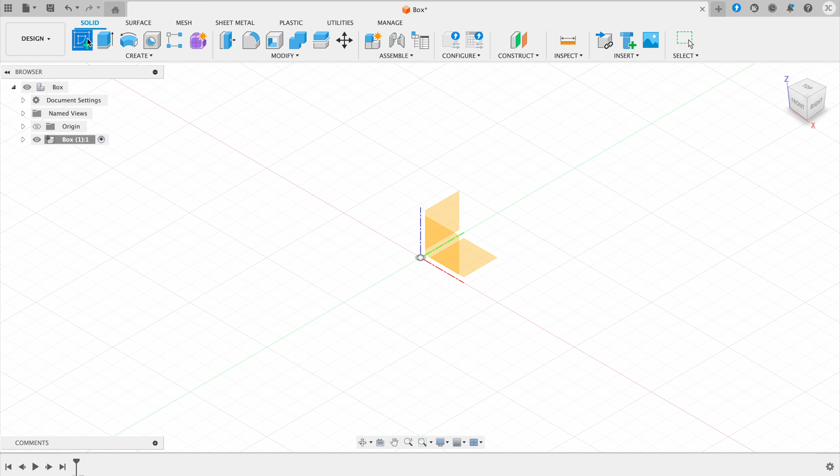Now that we have our new component, we want to draw a cube. So come over here and create a sketch, and click on this plane here.

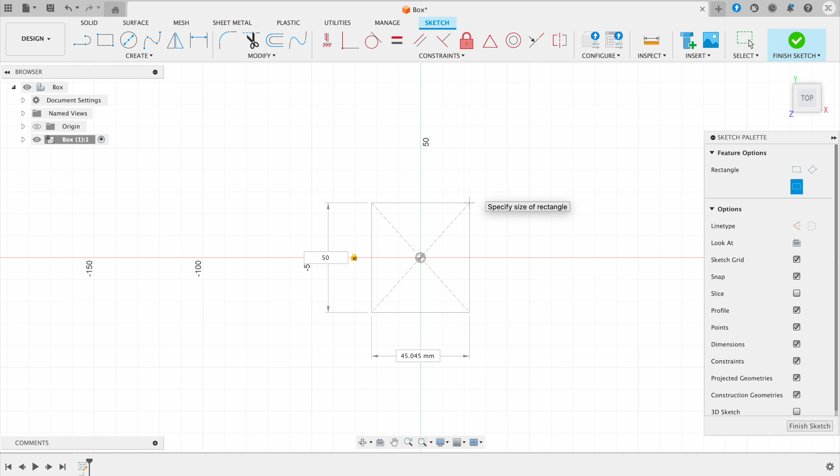Next, we want to click on create, click on rectangle, and then click the center rectangle. Then we click the center point, bring this out, and we want to do 50mm. Then hit tab, and do 50mm again. Then press enter on the keyboard.

Then we click on finish sketch, click on extrude, and extrude this out by 50mm again. Then click on OK to confirm this.

Now next, what I want to show you is importing and exporting. So I'm going to click on save here, and we're going to export this box.

As I mentioned in the first video, Fusion is actually a cloud-based software. So when you save these, it's actually saving to their cloud. If you want to export this to your own files, come up here, click on File, and then Export.

Depending on what version of Fusion you've got, you might have different options here. If you click this drop down here, you'll be able to choose different file types.

I'm not going to go into too much detail in this video, but as a brief overview, if you want to save something to reopen it again in Fusion, it's best to save it as a .f3d file, because you'll have the history of your design and can go back to make modifications.

If you want to save something for rendering or animation in a program like Blender, it would be best to use either an FBX file or an OBJ file.

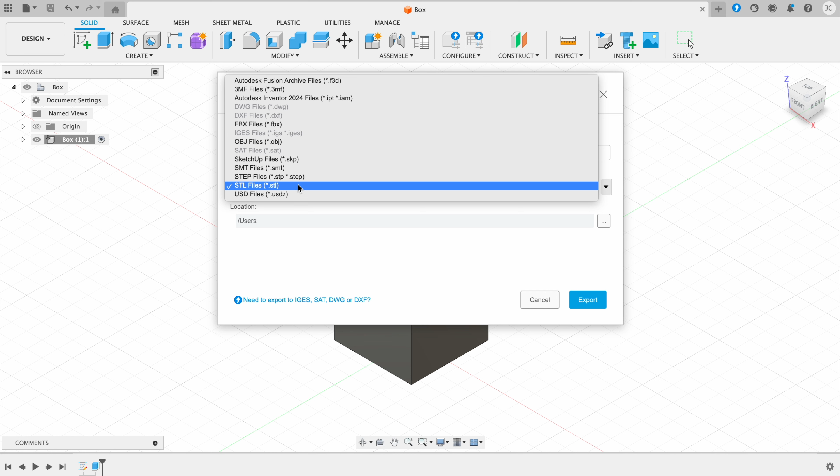And if you want to save something for 3D printing, it's best to save as a .stl file. That's just a really quick overview, and it really does depend on your use case, so it might be different for you depending on what you're doing.

But for now, for this file, I'm going to save this as a .stl and show you what I mean. I'm just going to export that to my desktop.

Now that's exported, I want to show you how to import the model back in. So if you come up here and click on Insert, and then we insert it as a mesh.

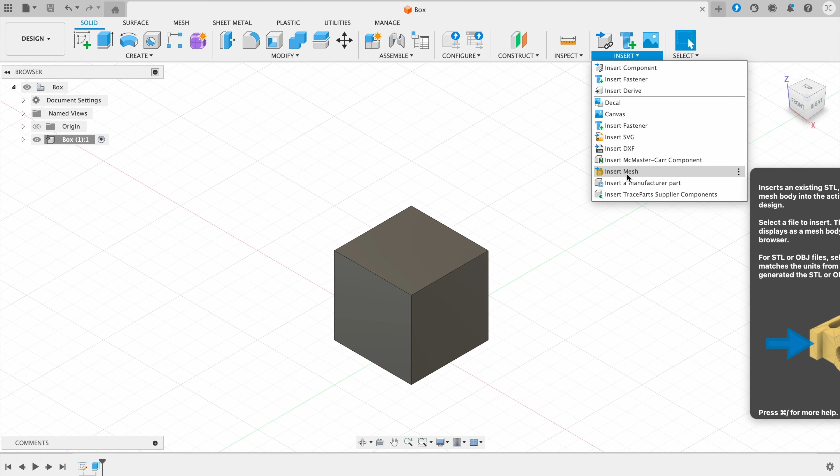I'm going to select that from my computer, choose it from my desktop, and choose the file box. You can see that it's re-imported my model.

And just to make this less confusing, what I'm going to do is go and move this over to one side. Then I click OK.

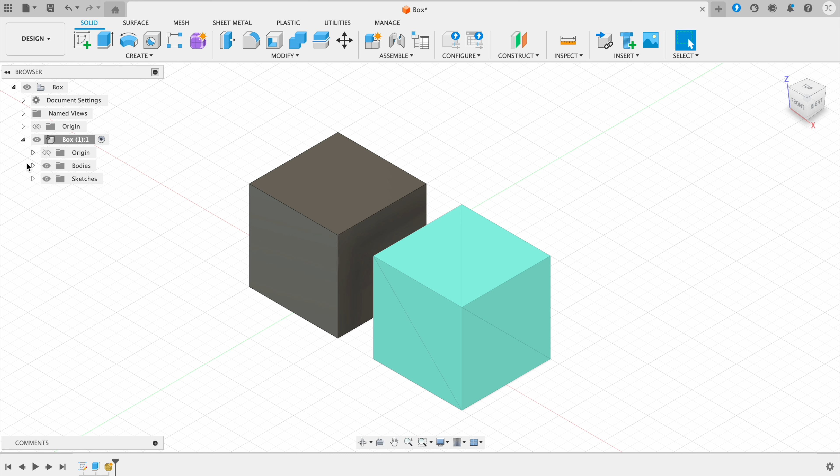Now you can see this has come up in a different colour. And if we drop these down, we'll be able to see that it's highlighted it as a mesh.

Meshes may be something that you come across during your journey learning Fusion, and especially if you're into Fusion for learning how to do 3D printing. They are more difficult to work with inside of Fusion, so just bear that in mind.

Also, something else that I want to show you is Inspect. Inspect basically has loads of tools that allow you to just analyze your model. I'm going to show you a few of the basic ones in this tutorial that could be helpful for you.

We've got the measurement tool here, and if I click on this, you can use it to see different measurements on your model. If I click between these 2 points here, I can analyze that this is 50mm. So I'm going to close that now.

Another one I want to show you is section analysis. This allows you to take a cut through your model to see inside it. It's just for viewing, it doesn't actually cut the model in half. I'll show you what I mean.

So if I click on the section analysis, then I actually want to click on this plane here, but because the cube's in the way, I'm not able to.

So what I can do is go to my origin plane here, click on it, and then you can see it's here. It's the XZ plane.

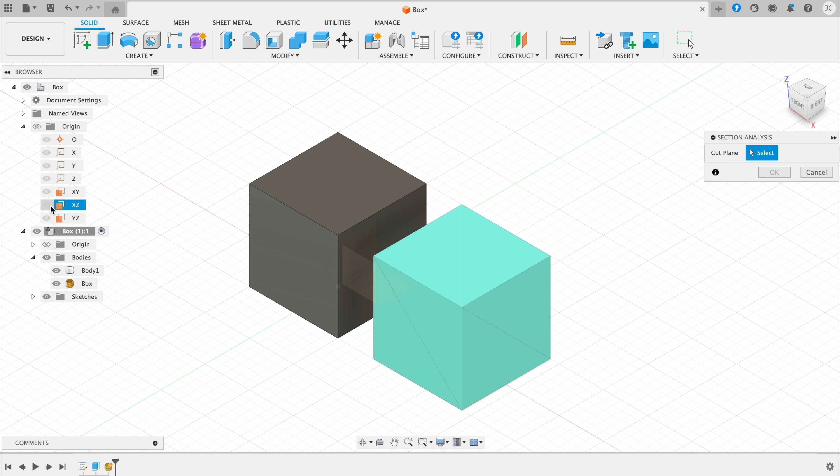So I click on that, and now you can see that it's cut halfway through my model. Then I click OK, and I'm just going to spin this around, so you can see what I was talking about earlier.

This is where body 1 is a fully solid body. But then you can see this mesh here is actually hollow. So that's the difference between the two.

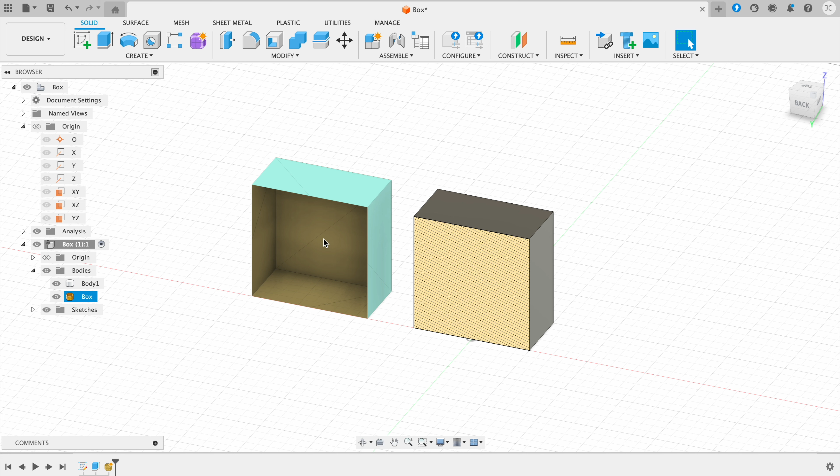I will go into more detail on exactly what meshes are in another video, because they're very useful for 3D printing. So now we actually want to delete this mesh box here.

So we right click on it and press delete. And then you can also see here we've got our analysis.

And we actually want to hide this section analysis. Now we go back to viewing our box in 3D.

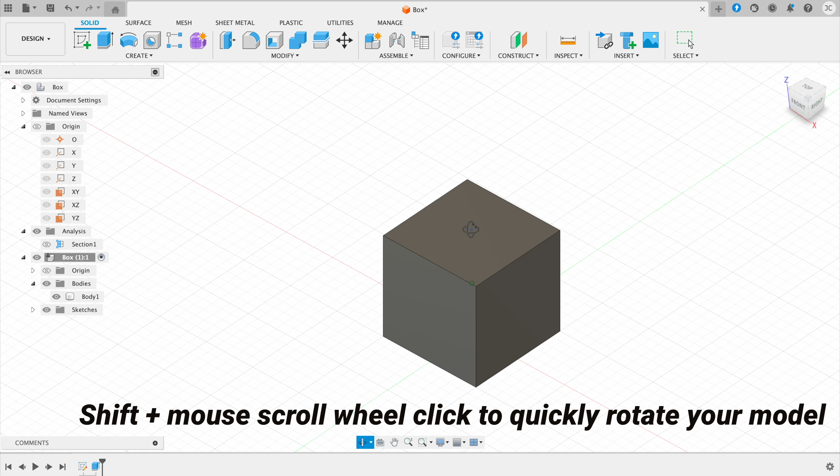So the next thing that I want to show you is something that's really helpful and can also save you a lot of time. For this section, don't copy this yet because I want to show you something first.

So if I press create here and then I click on hole, and then what I want to do is click on this top surface.

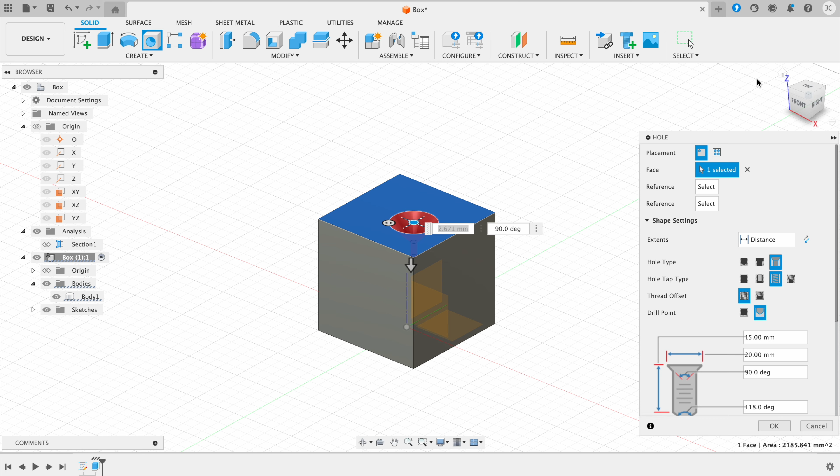And you can see here that it's creating a hole. I'm just going to move this to the center point. This might look a bit complicated at first, but it's actually quite straightforward. These holes are really useful for creating holes if you're planning to put screws or a fixing inside that hole.

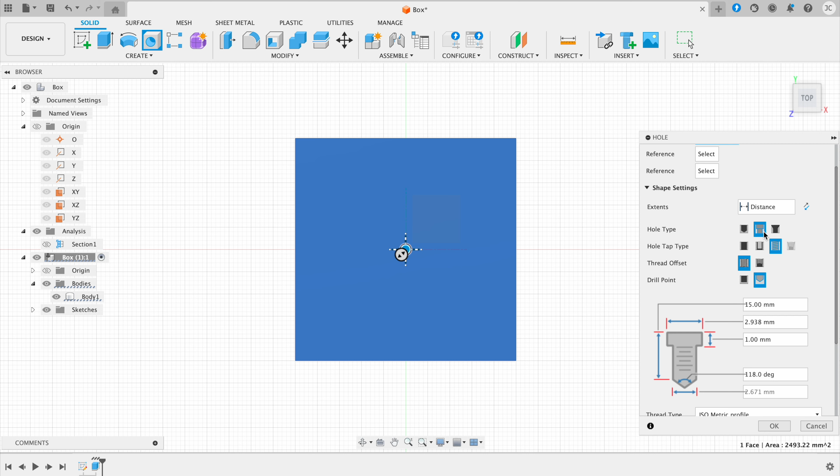Here you can see the type of hole that you want, and these are really helpful for making sure any fixings fit into that hole. So let's look at hole type: you've got a simple hole, a counterbore hole, which is this section here, and then a countersunk hole. A countersink is this section here, and it allows the screw to be flush with the surface.

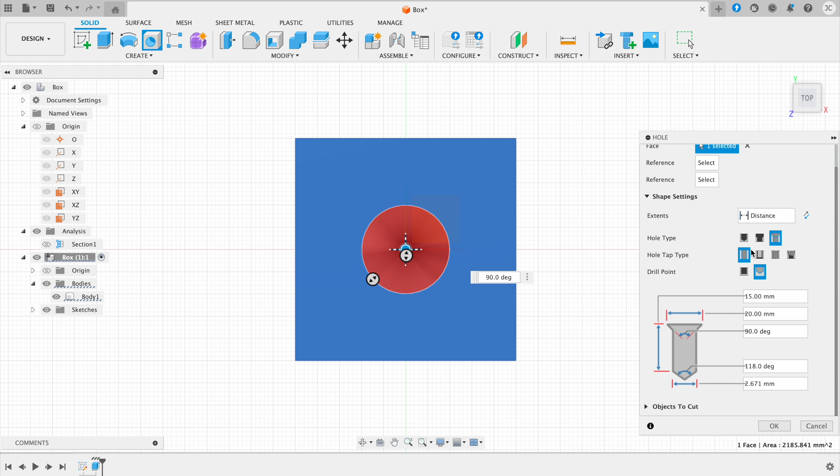Then we've got hole tap type. For those not sure, a tap is basically a thread for a hole that allows a screw or bolt to be fastened to it. If you've ever built any IKEA furniture, you'll know what I mean. So you can see here we've got simple, then clearance, and then we've got a tapped one here.

Then we can change the drill point to either flat or at an angle. Something to note is that the tap shown here is only a representation, it's not actually physically there in the model. So if you're creating something that's going to be a physical part, either with 3D printing or another way, you're going to need to use the modeled checkbox in the hole settings.

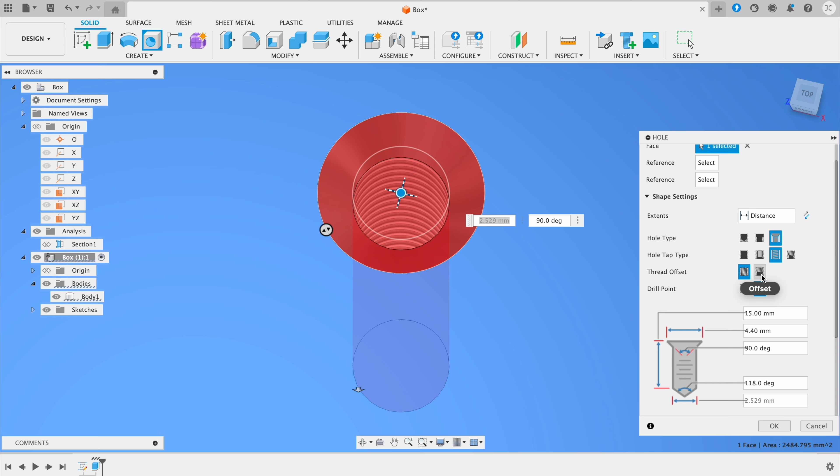We also have an option here for thread offset. This will be helpful depending on what screw you're using.

So first, I'm actually going to cancel that. Please don't follow this step yet, I just want to show you something. If I click on Insert and then Fastener, you can see there's a library here with a load of different bolts, screws, nuts, also rivets and washers. This saves so much time. Instead of having to draw these things independently, you can just use this library, and you've got a full catalogue of different parts.

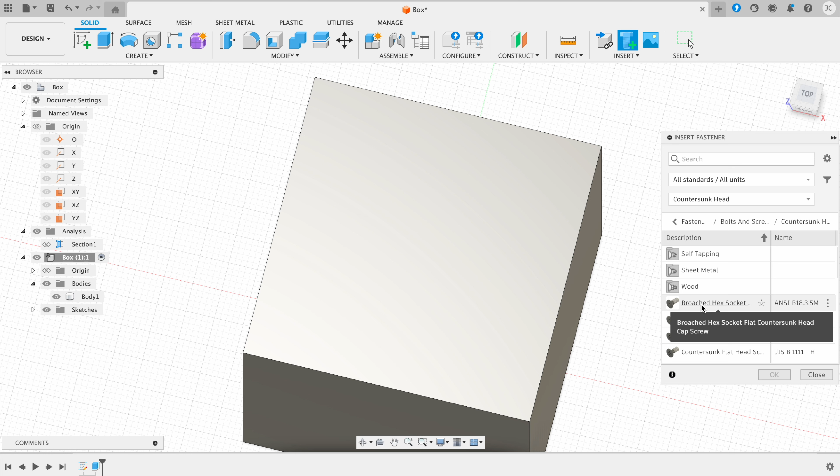So I'm going to choose this one for now, click on it, and take the information from this screw. I can see that the size is an M3 and the length is 6mm. I know I'm not going to get this exactly right the first time, but it really depends on the screws you're using for your project, and I just wanted to show you this as an example.

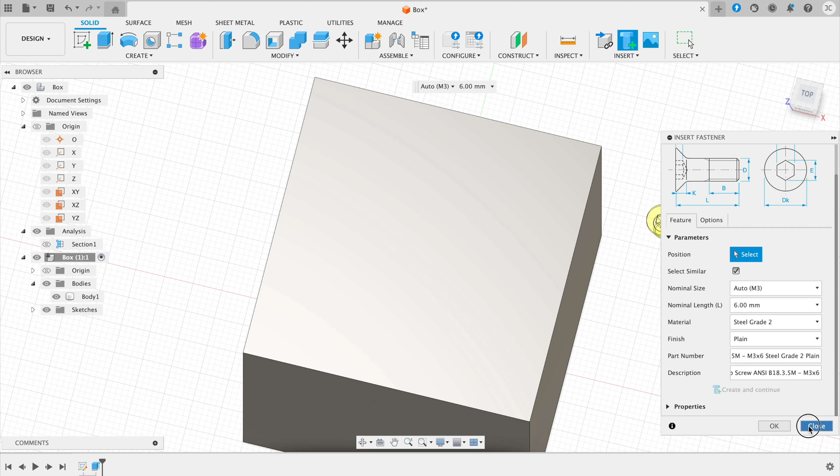Now you can start to follow along with me. If I go back to the hole and click the top here, I position this in the center. Yours may start off looking slightly different, so just have a look at the hole settings I've got there and copy my settings for now.

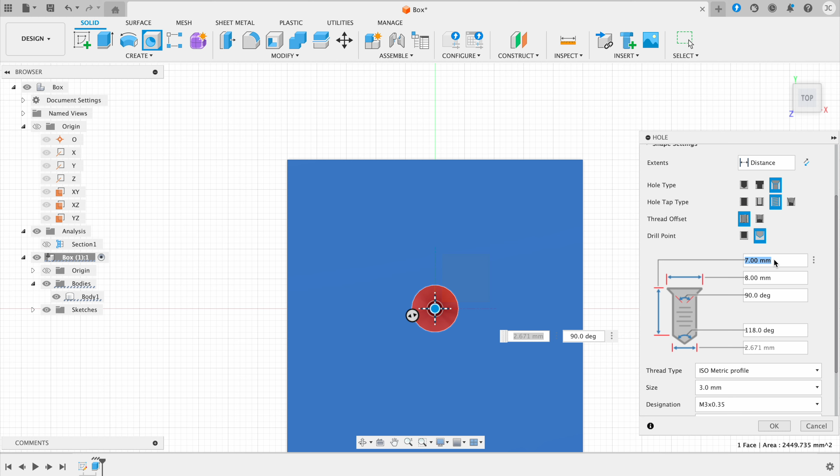Now we know that the size needs to be M3 and the total length was 6mm. Rotate your view back round to looking at the model in 3D, and now I want to change this one so I've got a countersunk head. I also want the diameter of this to be 6. So we can either use this handle here or alternatively type this in.

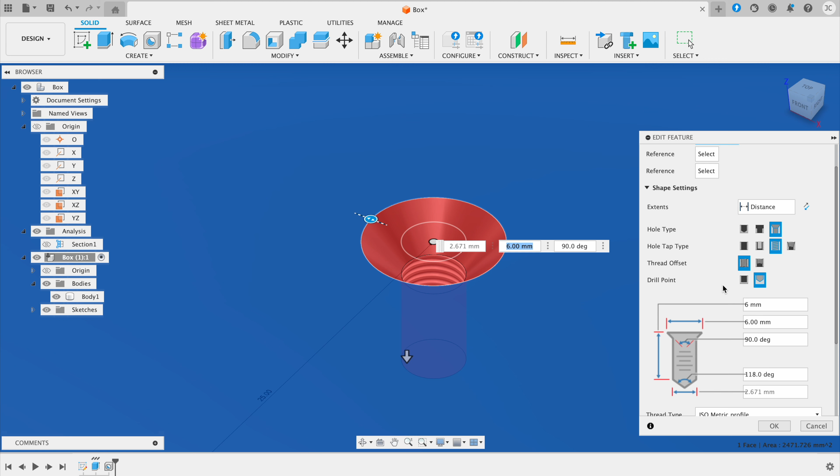Now let me show you how to add a screw. I click here on OK, and then we go back to the first one that I selected. We want to click on countersunk head, and click on this one here. Then you can see we can position this using our mouse, and we click on the surface of the countersunk hole.

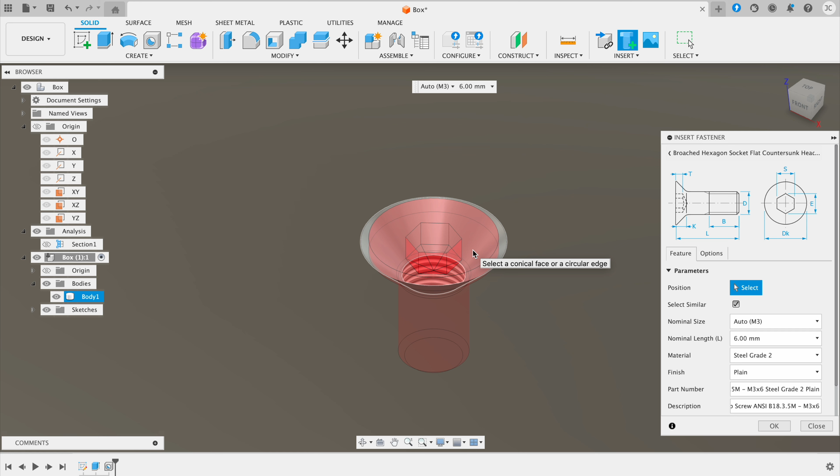Now, this one's actually gone red because it doesn't exactly fit the hole, but that's okay for now, I just wanted to show you this as an example. You can see this warning comes up, but it still does allow you to insert it. So once that's done, I hit enter, and you can see that it's added my screw to the hole.

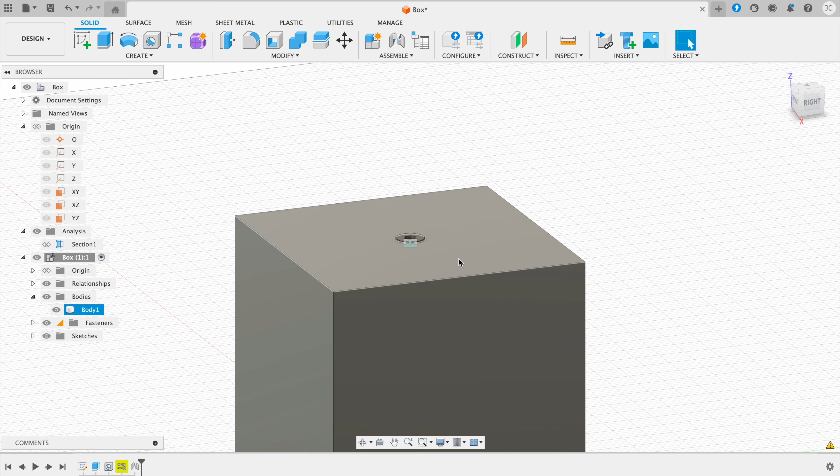Now what we want to do is come back to our section analysis. We're actually going to see that, yeah, it is overlapping a little bit, but that's okay for this example, because you'll use different screws and different holes for your project, so just make sure for your project they fit right with one another. I just wanted to give you an idea of how it's working in this video.

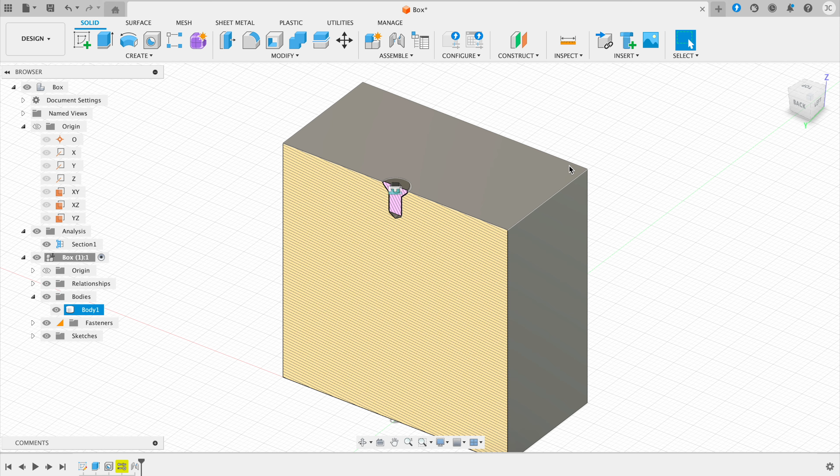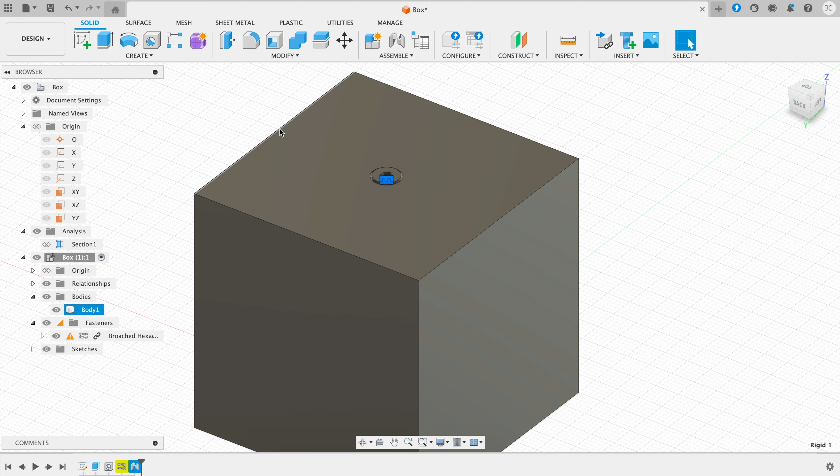You can see over here it's also created a new folder called Fasteners. And you may be wondering what this is over here. Well, this has actually created a joint in the assembly, and a joint defines the position of two components inside the assembly. We're really going to go into more detail on that in the next video.

So then we come up here and we click on save.